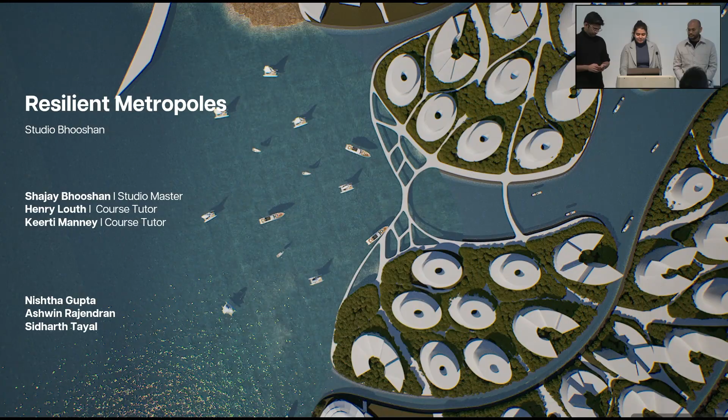And we are proposing a new Amsterdam, a template for new coastal cities. Currently, 8 out of 10 megacities are on the coast, and around 40% of the world population lives within 100 kilometers of the coast, because of the trade, which is the major factor of development for cities on the coast, and resources like oil rigs, and for some cities, tourism is generating their major economy.

As per World Bank Urban Development Report, 1.2 million square kilometers of new urban area is expected by 2050, and we believe that it will be on the coast because of all the advantages it has to offer for a city growth, but the location of coast also comes with an issue of flooding, where already 1/4 of the world population is exposed to flood, and it will increase every decade.

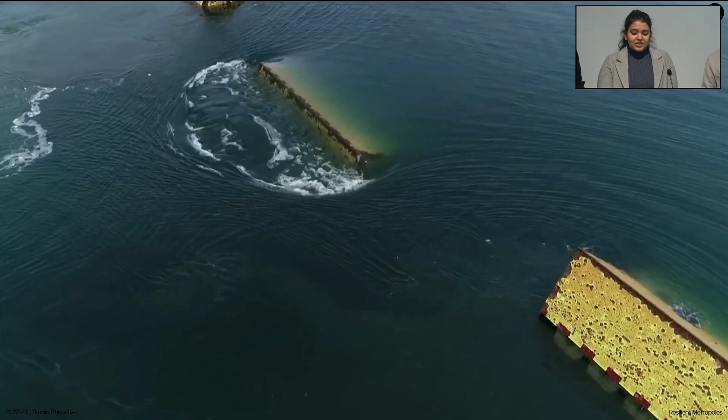Currently, cities are using barriers to protect, but they cost a lot and are only a temporary solution to this inevitable issue. But cities like Amsterdam are flood resilient by design, built with the network of canals, being the center of attraction for the whole city. Used in the beginning for trade and now for tourism, where everyone has paid for their share of canal frontage, reflecting the city which followed water and economy over time.

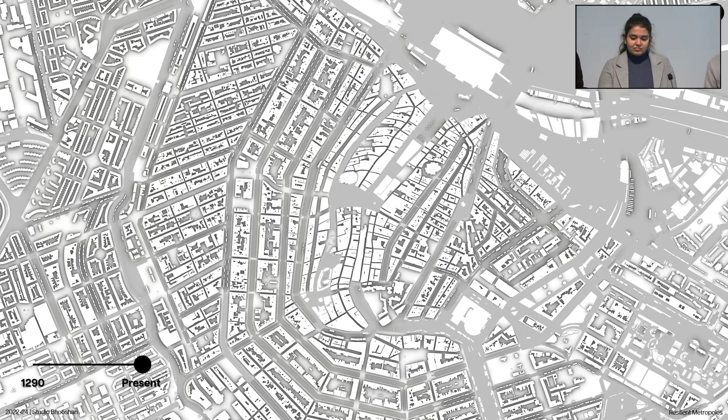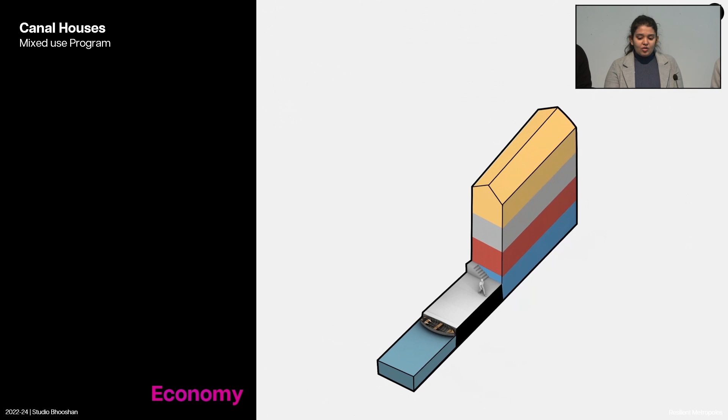With Amsterdam, our research is centered towards the growth of Amsterdam over the last 800 years, where all the canals and infrastructure were communally funded. Zooming into the current land use of the city, most of the regions are mixed use. Even 400-year-old canal houses are also mixed use, consisting of retail, storage, residential, and workshop in the same narrow building, which was rarely more than 9 meters because of the land value of the canal frontage.

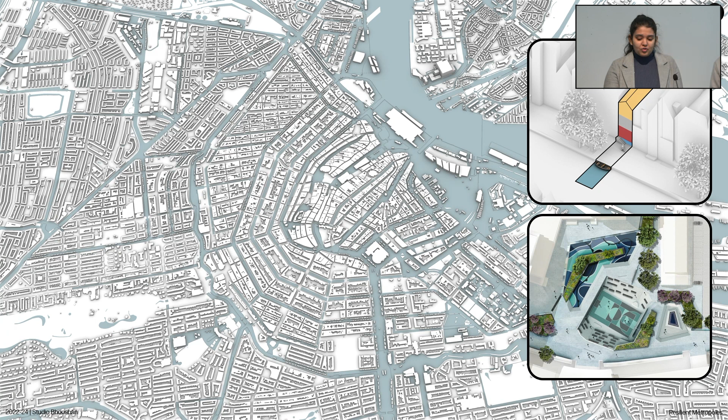With the case study, we are taking forward the major water management elements of the canals and the urban squares and the land use which will grow over time to form the city following economy and water. But we do not have another 800 years to wait for another city, and we cannot keep building 3-story narrow canal houses.

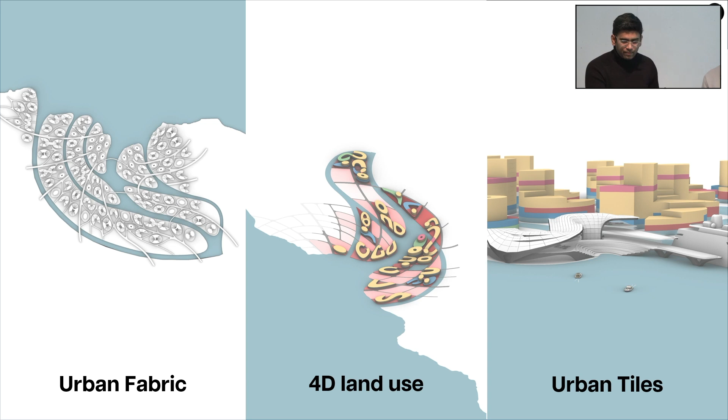And moving forward, we are combining the studies. Our research framework is centered towards the urban fabric, 4D land use, and the urban tiles. We are proposing our prototypical coastal city at the Thames estuary, which is the entrance to the trade route from Europe and estimated to develop at least 1.3 million new jobs in the next 25 years.

Under urban study, we studied canals and street networks. First, we started with analyzing different grids under flooding conditions, like rectangular from New York and radial from Amsterdam. We found the curvature of the grids helping in reducing the velocity of the water. To study the urban curvatures, we studied Amsterdam and Venice, which are canal-centric historic cities. The curvature in both the cities varies.

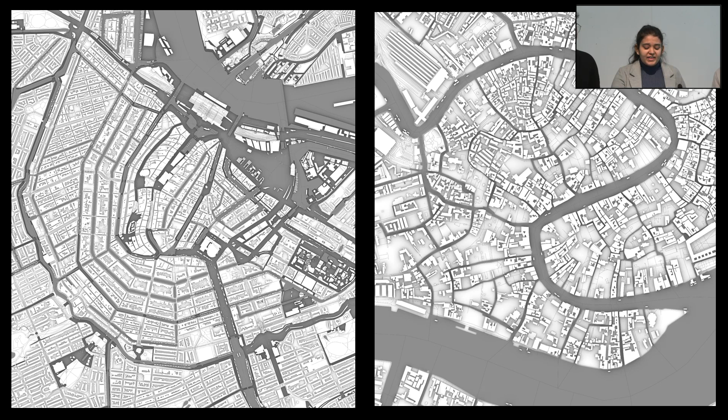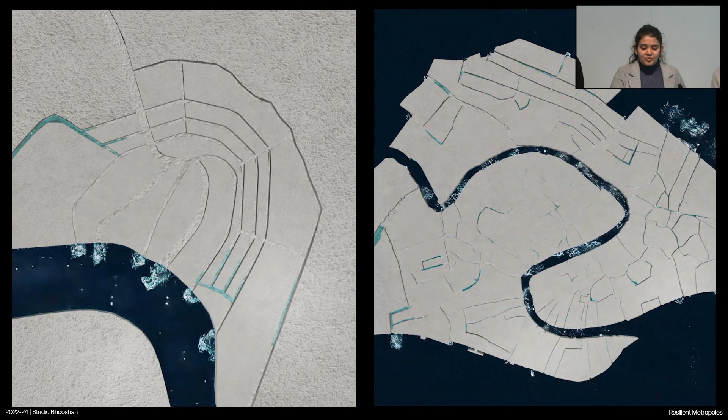In Amsterdam, it is concentric radial canals, whereas Venice is made up of several separate islands, hence has organic canals. We found that due to non-uniform curvature in Venice, during low water levels, the water is stagnant in some areas, which is causing issues for the residents. Whereas in Amsterdam, canals allow water in and out of the city smoothly.

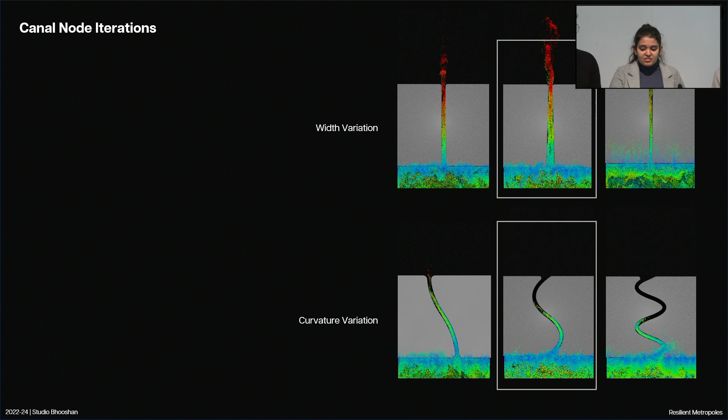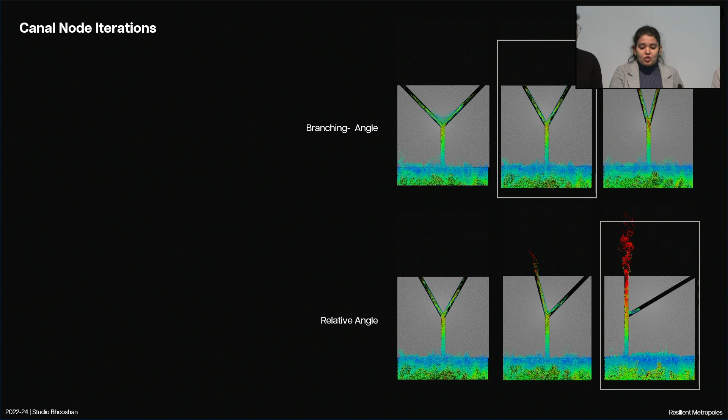Urban studies led us to the study of different canal nodes. We found that width variation, wide mouths and reducing the width, allowing stretches, allows reducing speed gradually, and too tight curvature led to overtopping. Under branching study, we found 60-degree branching allows energy dissipation as well as avoids overtopping in junctions, and 30 degrees relative angles can be used to accommodate extra water from main canals. And gradually increasing the degree of branching allows uniform energy dissipation, and branching mouths also help in reducing the inundation at riverfront.

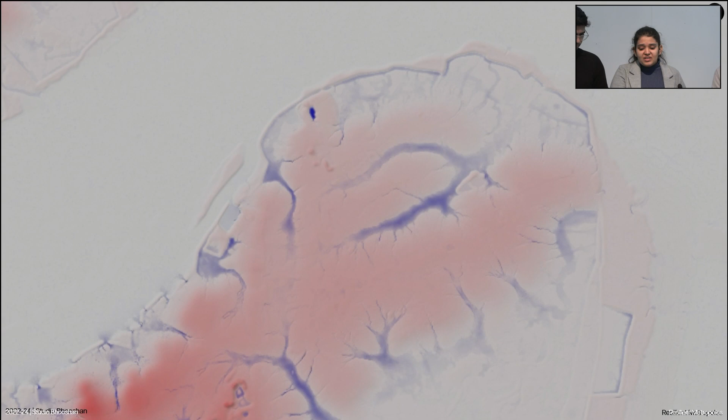To design on site, we found low points on the terrain with the surface runoff and iterated on site with existing canals and added iterations on extensions which can allow extra water to flow through, and further iterated by bifurcation, width variation and avoiding sharp angles and curvatures.

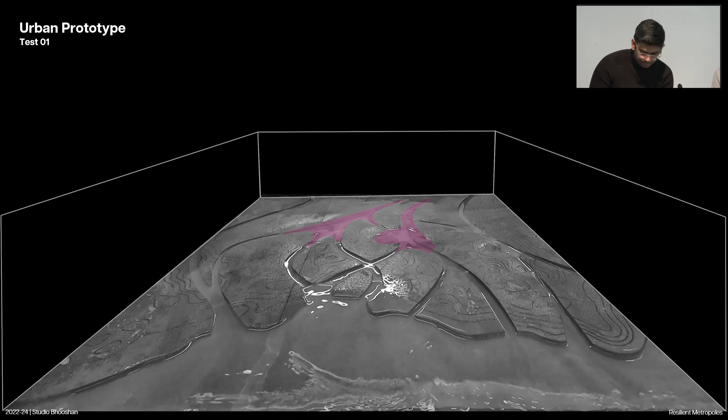Under physical prototype, we made a flood tank to test our canal iterations, in which we noticed water showing inundation at the nodes behind due to low points. And as a result, we could map to create the urban sinks that we can use in the fabric to deal with this issue, and also the inundation zones which need to be improved with different canal making strategies.

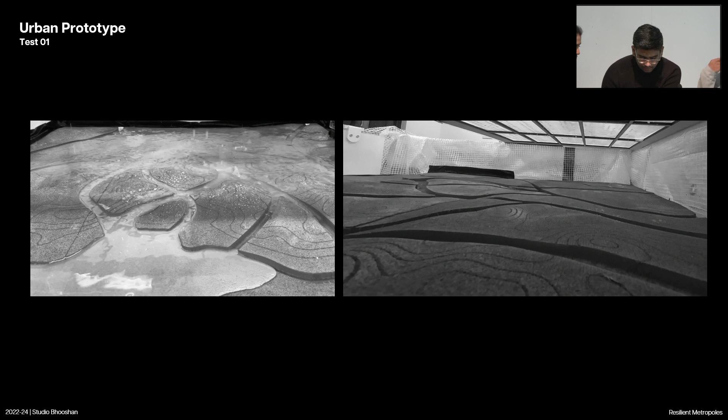And we also tested it in case of heavy rainfall, where we studied the surface runoff and the effective distribution and placement of the canal, how it tackles the load of surface runoff water. And also water was accumulating in almost the same regions in the tests.

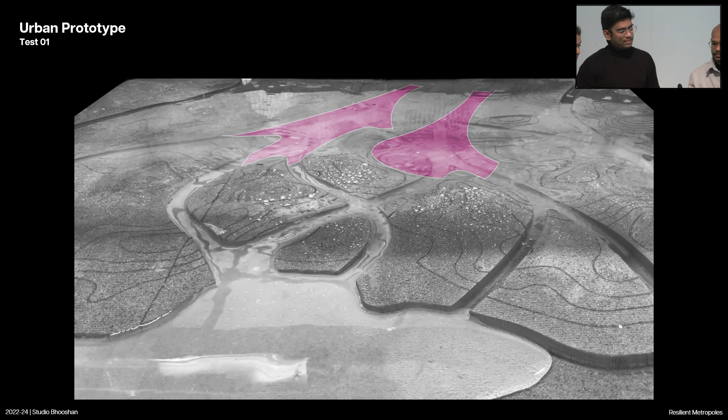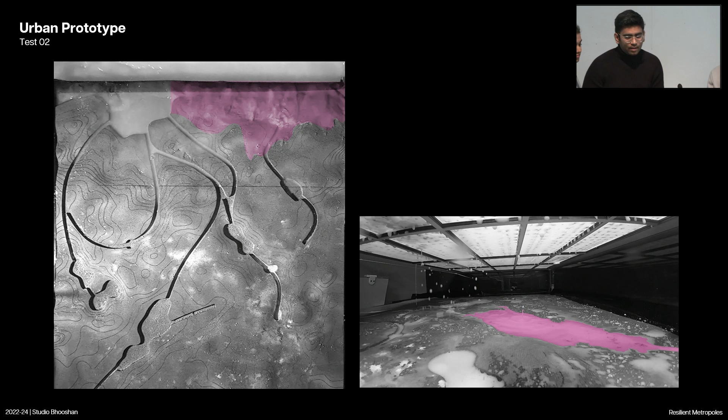And this was a previous test in which, in this scenario, we didn't include the node and angle iterations. And it was created with that. And we could map more inundation areas and concentrated sinks, which were better designed in the other iterations.

The next step was a street study, seeing cities like Manhattan and their urban fabric, where more than 70% of the city is impervious. It becomes important to research how streets need to be designed with respect to the terrain to minimize the water accumulation in the city. We studied research about water-based street networks, where the street grows from one end to the other, considering the angle of iterations, angle of freedom.

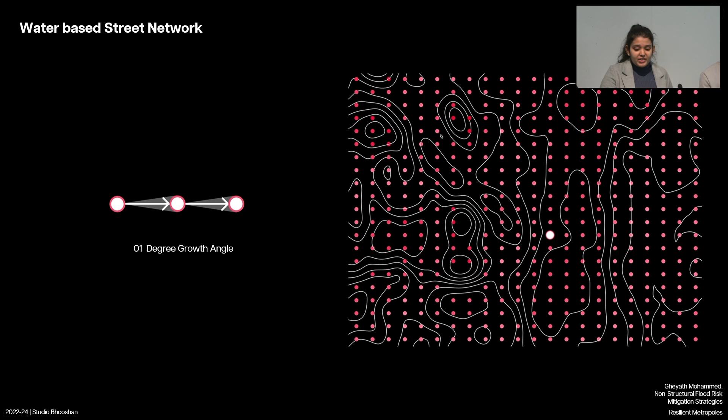For example, in this case, if the angle of freedom is 1 degree, the street will grow by finding the lowest point in that 1 degree of freedom. And if the degree of freedom is 10, it will assess the next lowest point in that range of vision. And streets grow like this with 1 and 10 degrees of freedom, considering the terrain as the map.

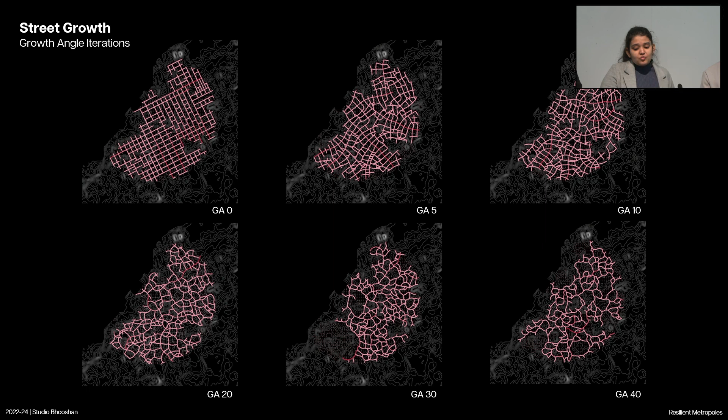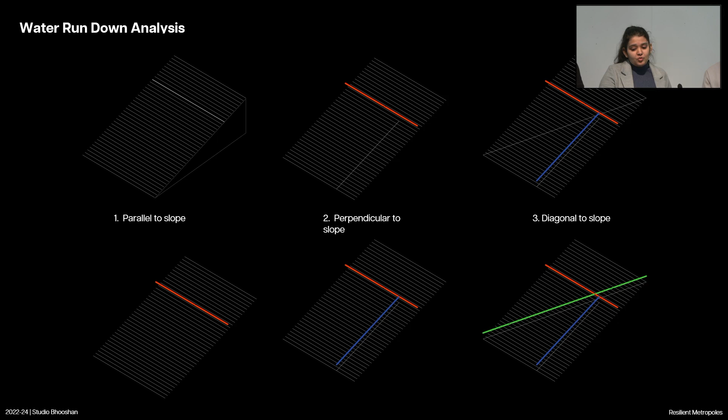We did some iterations with 0, 5, 10, 20, 30, and 40 degrees of freedom. We chose 0, 10, and 40 to analyze more. On the rules of direction with respect to the terrain, streets parallel to the slope allow the least accumulation, and perpendicular to it has the most accumulation. And we analyzed the iterations.

0 degree of freedom has no relation to the terrain, and 40 degrees creates negative junctions and has more accumulation. Whereas we found 10 degrees of freedom is best of all; we can see the least red zone. So there is an average range of growth which can satisfy both water and terrain based growth.

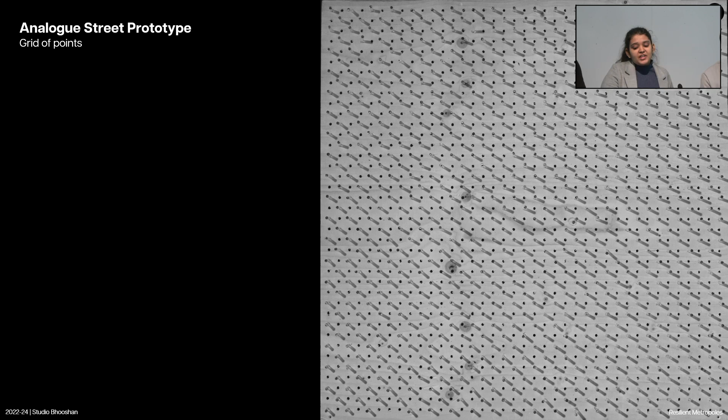Further, we converted this study into an analog model where we made a frame of a grid of 50 by 50 centimeters. We take the terrain data, map it to the gradient, and fix it to the frame. We start by mapping the canals first and then the major streets to give the global orientation, and the parcels after that. The steel core wires and the grid allow us the same degree of freedom range that we studied in the research, and also control the curvature of the streets.

These were some of the iterations we did, where we are trying to fuse different grids as well, for example, radial to rectangular, or diagonal to rectangular.

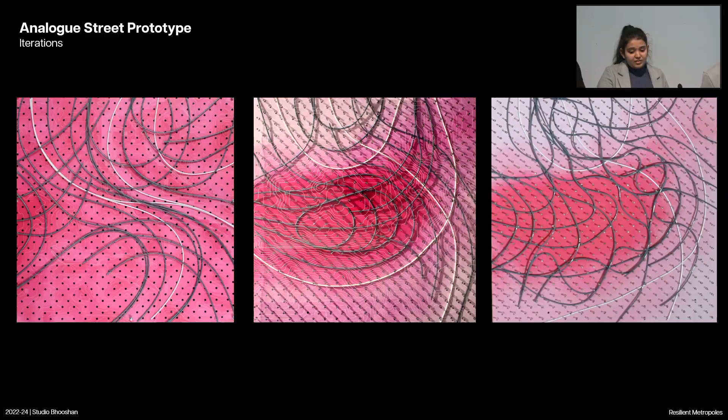Moving from urban fabric, we are proposing a 4D land use simulation prototype with multiple players. We also looked into the ghost towns in China, which have left the country in losses and debts. There are 65 million vacant houses in them, whereas Amsterdam's growth along with infrastructure was over time and communally funded, and has survived 800 years. Our land use system is a proposal for resilience against these ghost cities.

The first prototype of the game is a block game. It is a two-player game which we played ourselves. One had the role of developer and the other was the government. And the site was a grid of land parcels with descending land value as per the proximity from the sea.

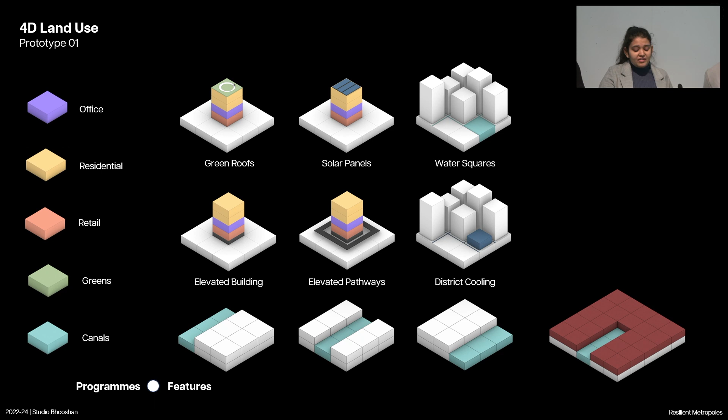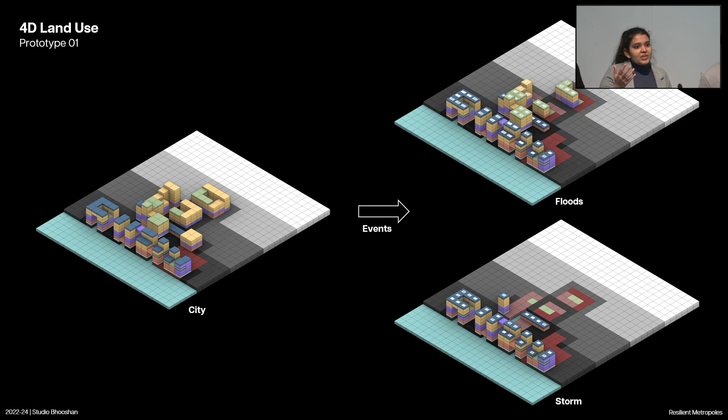Players have blocks of different land uses to buy and different strategies they can invest in to make their buildings in the city area resilient. And they can also buy parcels to dig canals. This was the first simulation that we did. After every turn, there are events like floods and storms. So we can analyze how many buildings survive after every event by how much players have invested in the strategies when they were playing.

The land value is mapped on the unlocked parcels in the beginning of the game. It is mapped according to the natural context. With each move, the land value of each parcel changes, which can increase or decrease considering the occupied parcels in the context later on.

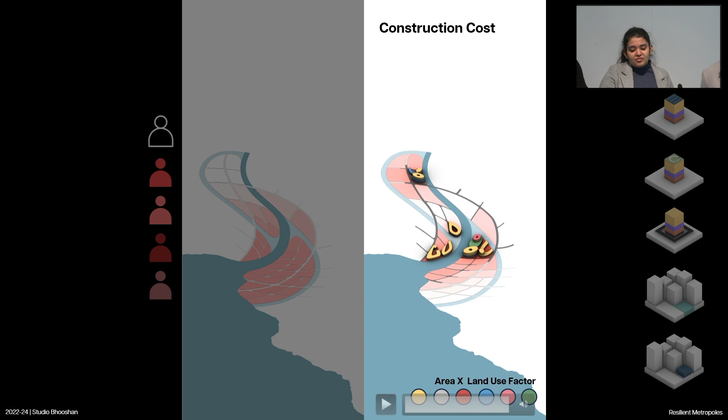Under land use, we have residential, industrial, commercial, and offices, majorly known as the RECO programs, and others are the recreational and green spaces, where each land use is given a factor and a construction cost which is multiplied with the area.

And for revenue, players collect rent from their buildings and pay taxes to the communal player, which uses the money to buy infrastructure like canals and roads for the city. And if a player invests in strategies like these, they get a reduction in the tax, like a subsidy, which gives resilience and character to the city in return. So that's a win-win situation.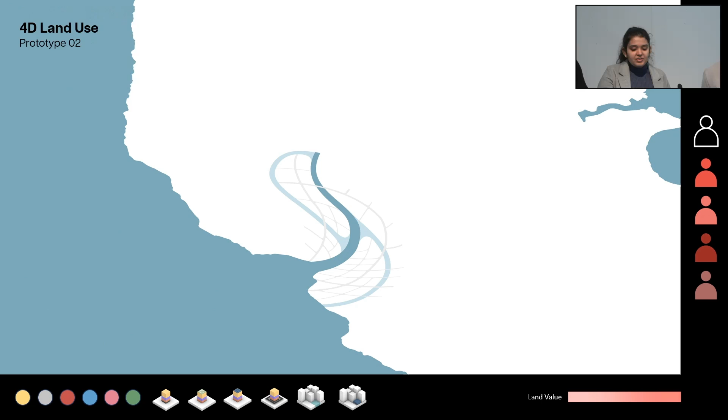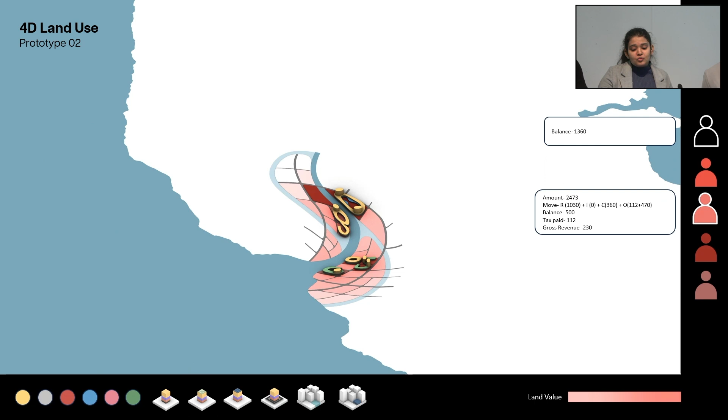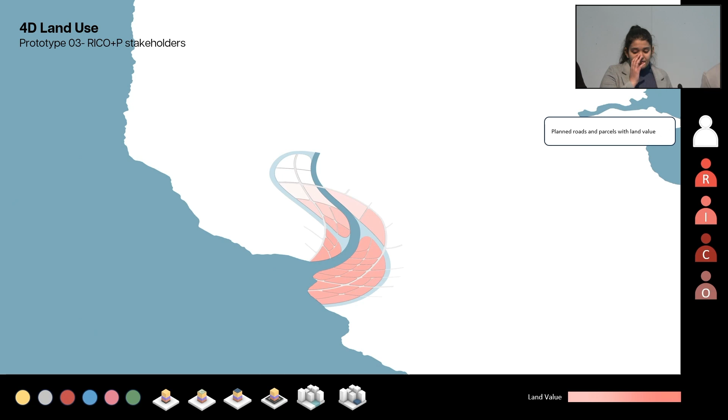In the third prototype, we have assigned stakeholders the role of investors of residential, industrial, commercial, and offices, so that the needs of all the users can be catered. And we have a new rule that the players investing in higher land value will receive higher revenue. The play allowed players to invest according to their preferences. Office players might not need to invest in the higher value riverfront views, whereas industrial can build fewer floors and invest in the land area.

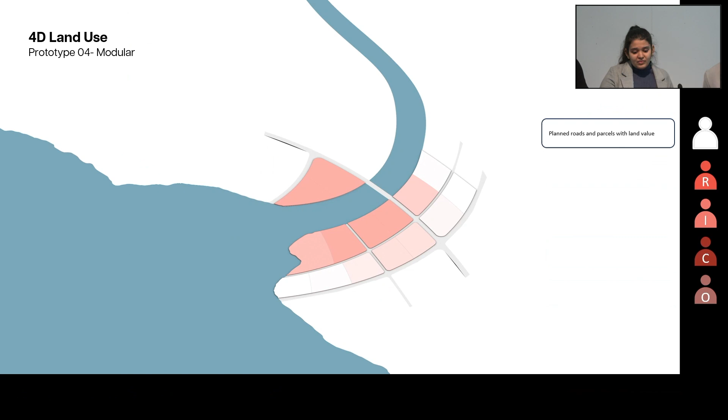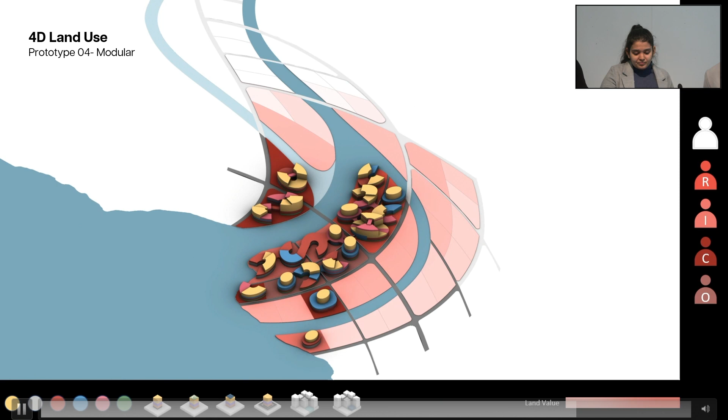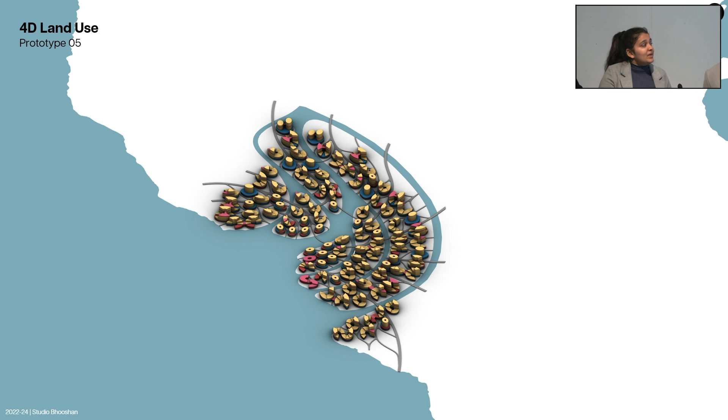In the fourth prototype, we use the rules incorporated before with the modular alphabets to define the form of the city throughout. In the next prototype, we have defined the blocks in the range which unlocks with the population growth, so that it can give the whole city global orientation and a 3D parametric view.

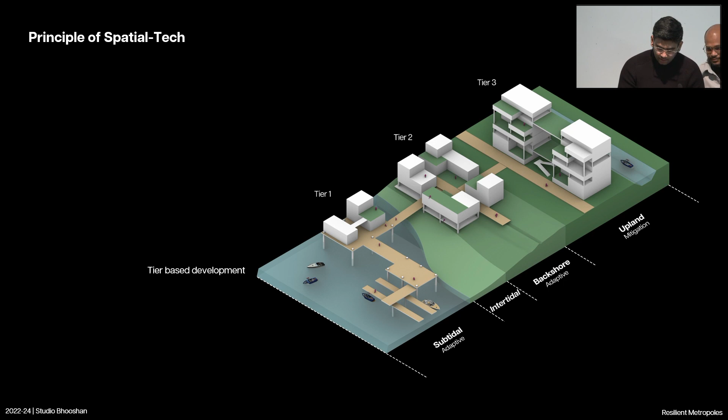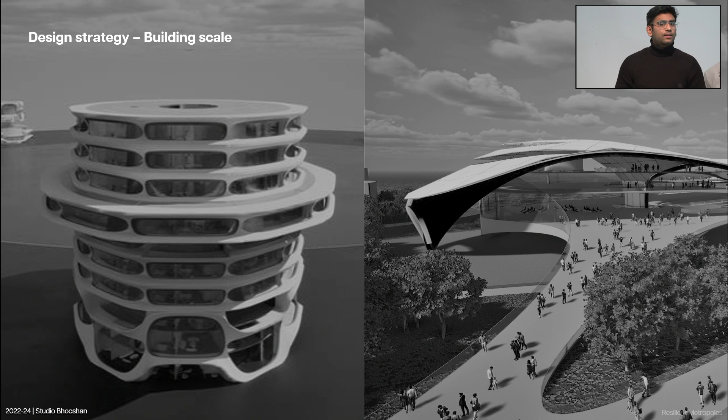Moving forward in the building scale, not only the growth of the city limits the building, but also the distance from the water affects the buildings, which is based on different tide zones, called subtidal and intertidal zones. And the design strategy for the building scale, we are approaching it in two levels. One is the tower level, where the tower deals with high-speed winds, and another level at the bottom, which is a shell structure that deals with water and flood-related resilience.

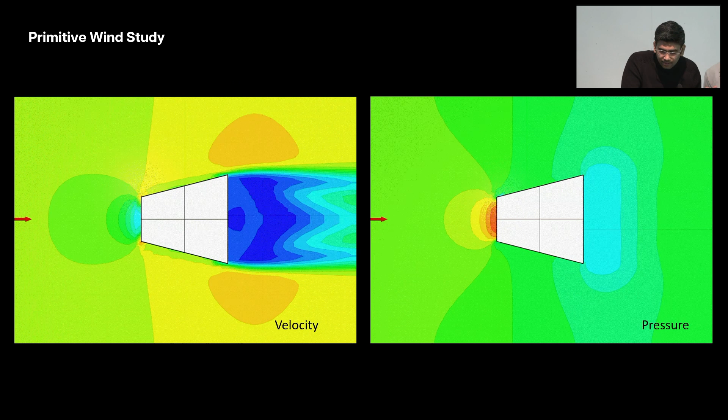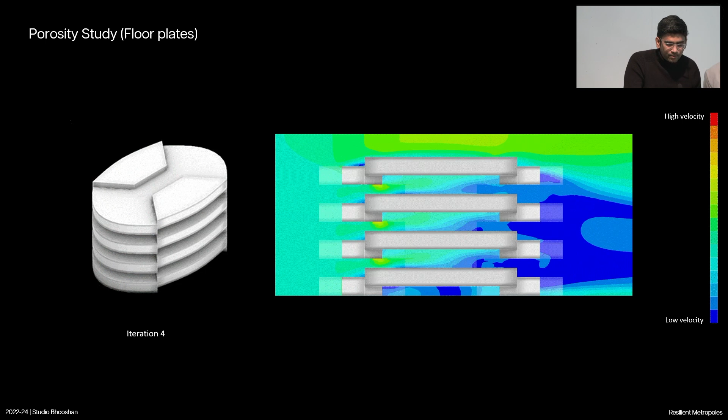So we tested different primitive geometry against wind, in which the geometry with least cross-section at the back proved to be more streamlined. In further iterations, we found oval as a more resilient and feasible shape against water and wind. To take this study further into three-dimensional space, we did a porosity study, where we studied different floor plate arrangements: straight floor plates, staggered floor plates, and porosities created on different edge conditions, from which we found the staggered floor plates created more low velocity zones at the back, which mitigates the wind very well.

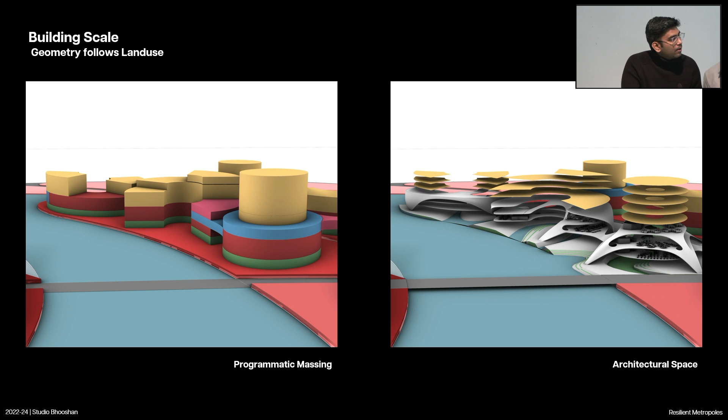And the building scale, in which the geometry follows the land use, and the programmatic massings that come from the game are converted into architectural spaces. These massings are developed based on the studies that we did earlier, the wind studies and the water studies. They will be pre-configured, and the player can place the programmatic masses.

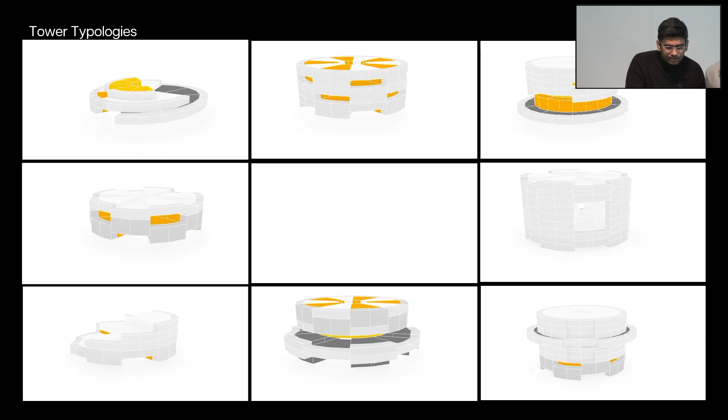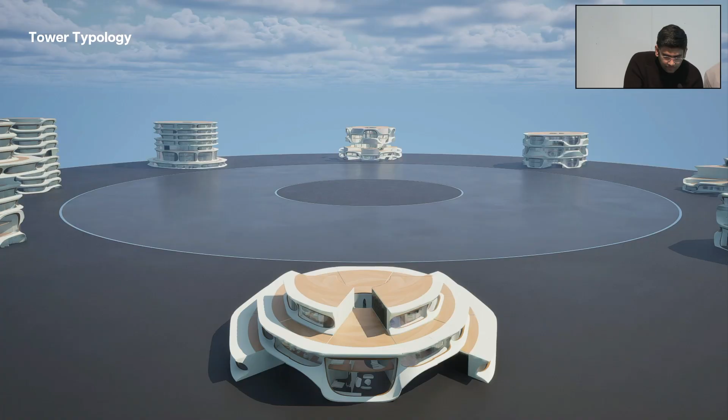And these are the tower typologies which we developed based on different floor heights, as we have tier-based gradation and also city growth-based gradation over the city. These are different floor heights for the tower, and this is the menu of replacement of those voxels into an architectural geometry, which can happen in many combinatorial ways, since these facades are made of unique instances that can be combined to form different iterations to make the whole city, which will help us build the whole city faster.

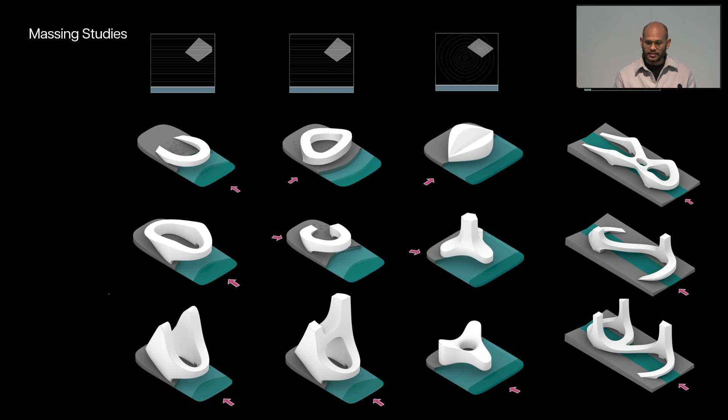In order to achieve resilience, we created different building massing in response to various terrain conditions. Similarly, for the shell structure, we explored a form finding method to design geometries that correspond to various outcomes from the

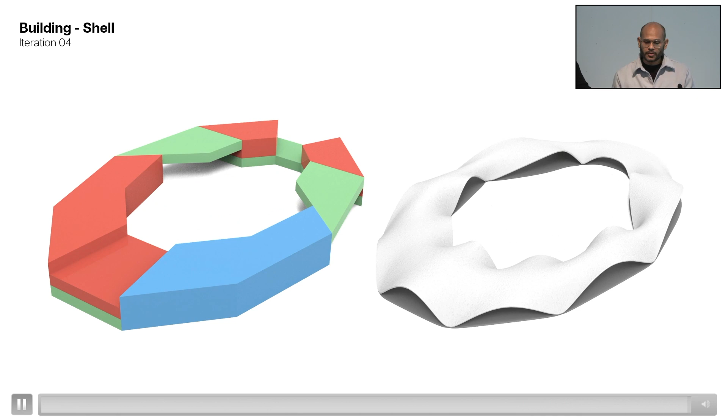Similarly, for the shell structure, we explored form-finding methods to design geometries that correspond to various outcomes from the land use simulation. Here are some studies of single-layer shell, and here are some studies on how multi-layer massing outcomes are translated into multi-layer shell, where void space can result in open spaces. Further, where the layer of shells was divided according to level, it provided open cutouts.

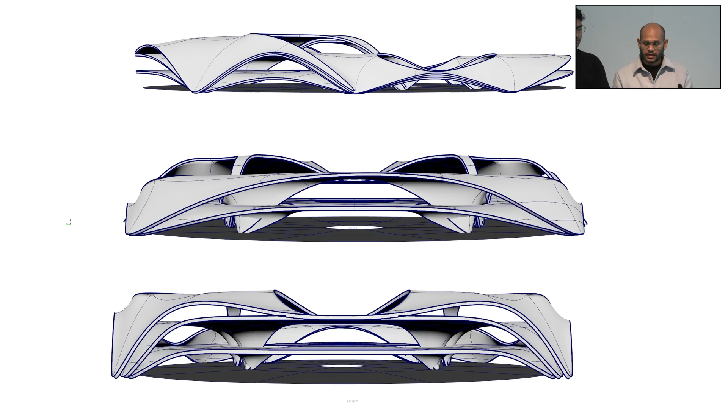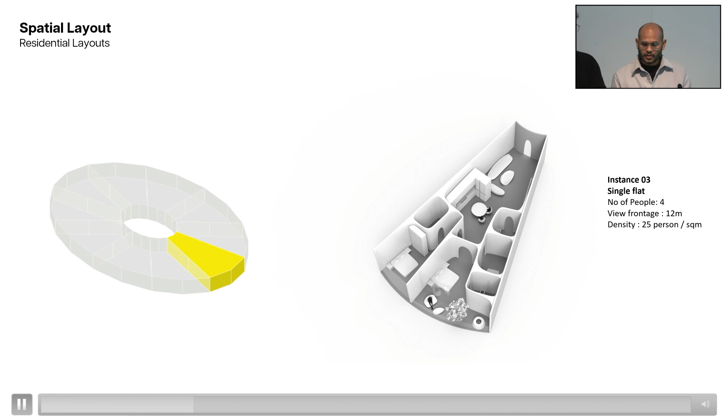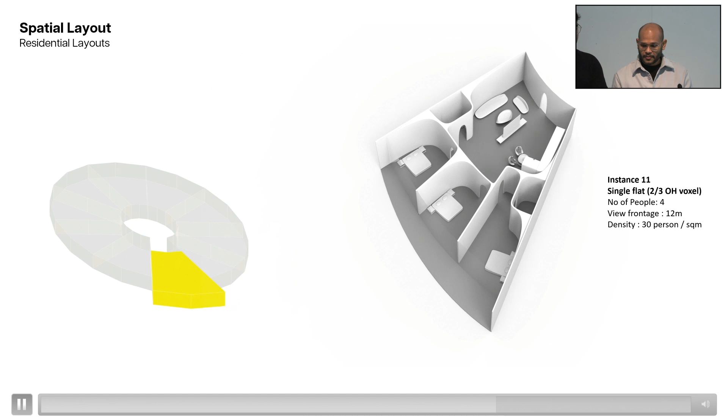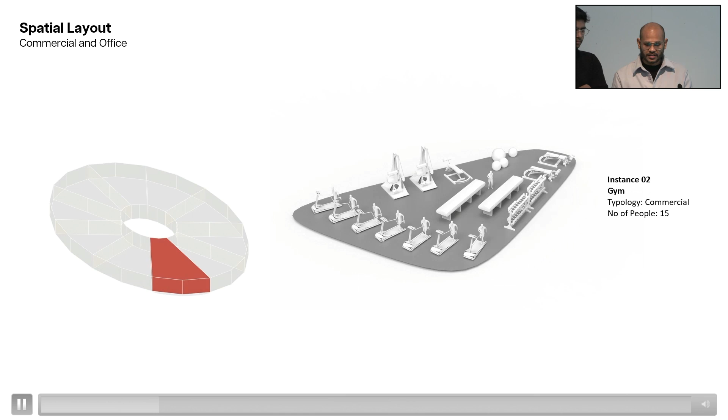Further, spatial layouts were explored according to form, where layouts were divided into parcels to provide better view frontage. The unique residential modules were created to provide various combinatorics, such as vertical, horizontally combined, recessed, and overhang tiles, which combine to form the residential spaces. These are the tiles for the commercial and the office spaces, created to adapt to different spatial conditions and people capacity.

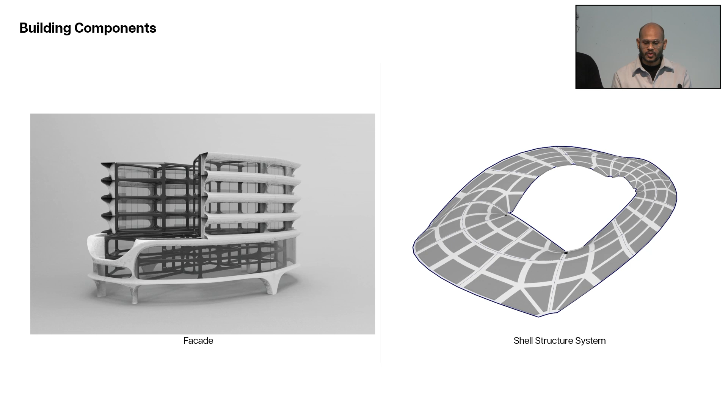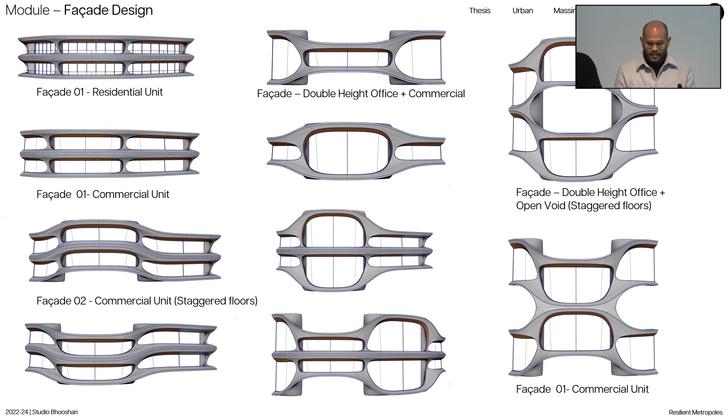Tower geometry further comprises facades and structural system. We developed a modular facade system that corresponds to the assigned program and podium. These are the facades, varied and differentiated according to the uses, like residential units, commercial units staggered, double height office plus commercial, and double height offices plus open void. These facade components are designed to be compatible with robotic hot wire cutting as a fabrication technique.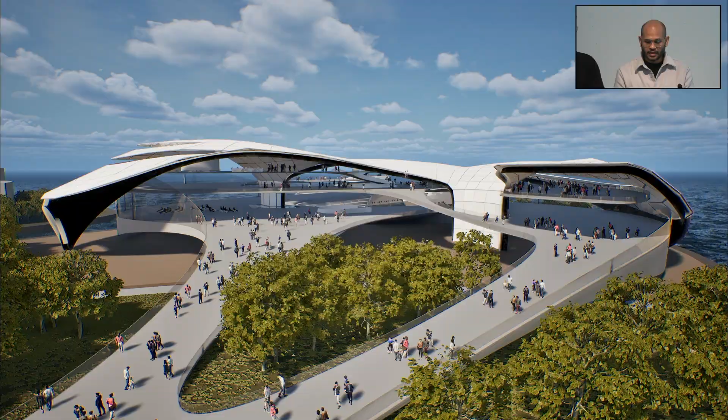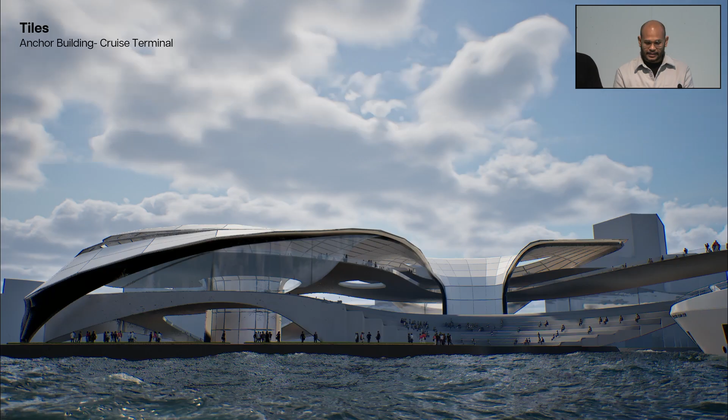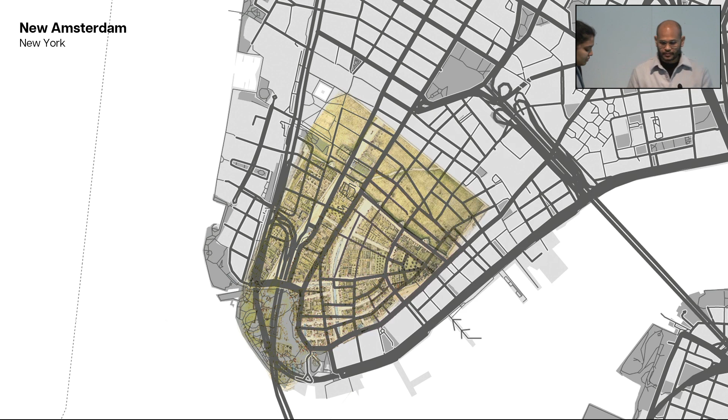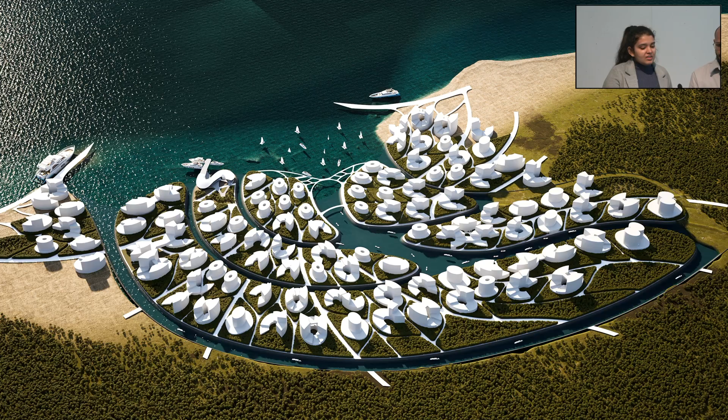Next, this is one of the building tiles converted from the game, the cruise terminal, which is unique to the building. These are some renders of it. New Amsterdam has been a proposal before for New York, and we believe our proposal can be the new template for the upcoming coastal cities as well. Thank you.

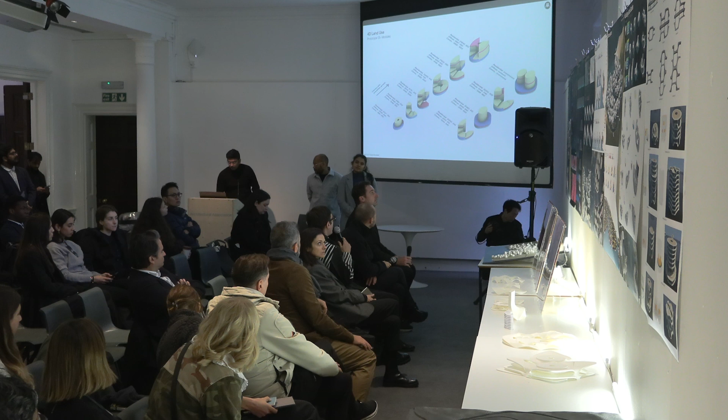Yeah, I think it's a super interesting question, and it also gets to the heart of what I think is actually fascinating about the project, which is the rigor and, to some extent, precision with which you've conducted these empirical and simulational tests, right? What you're doing is you're designing a sponge, right? You're making the city that's a sponge,

and there are a couple of things around sponges that I think are relevant to this project. First of all, especially when you're dealing with surge water mitigation, section is essential, right? And if you consider any developed city, a city like London is built on rivers. There are all sorts of buried rivers which became the basis for sewage infrastructure.

These kinds of channels don't necessarily have to be only the large-scale channels, but they become the veins and arteries that penetrate into these islands and become something which is actually volumetric. And if you extend this logic of plumbing that's intended to address storm surge, as opposed to accommodating human needs, the plumbing can actually filigree up into the buildings, right?

You can imagine the buildings as an extension of that sponge idea. And then the whole project becomes a kind of integral thing. The land, the water, the buildings, they're of a piece. And that's what I think is so compelling about this idea: you have an analytic framework and a generative approach to the geometry that can allow you to think about the whole project holistically in that way, which I think is actually quite fascinating. You're on the cusp of it.